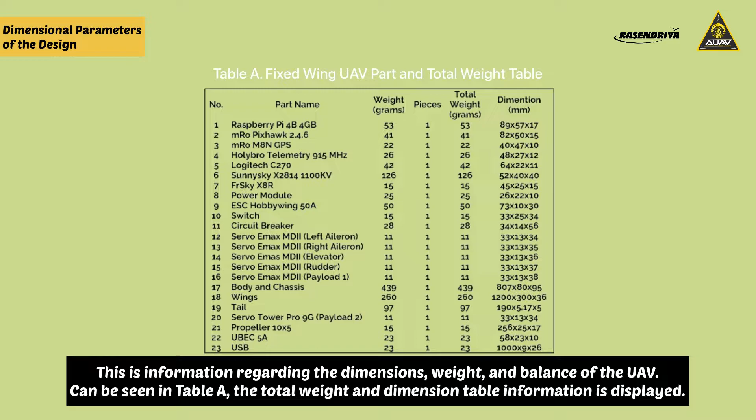So we will explain and show you our vehicle for this competition. Information regarding the dimensions, weight, and balance of the UAV can be seen in Table A. The total weight and dimension table information is displayed, while Table B contains information about X distance, Y distance,

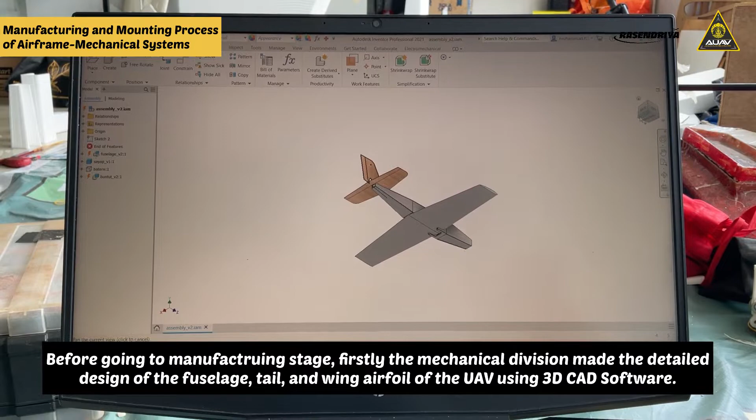and Z distance. Before going to the manufacturing stage, the mechanical division first made the detailed design of the fuselage, tail, and wing airfoil of the UAV using 3D CAD software. Designs made in the software are printed on plywood with 5mm thickness using the laser cutting method.

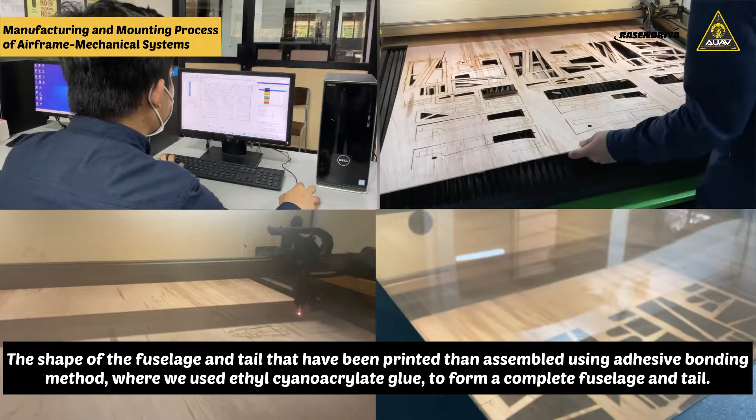The shape of the fuselage and tail that have been printed are then assembled using the adhesive bonding method, where we use ethyl cyanoacrylate glue to form a complete fuselage and tail. The fuselage is made with holes intentionally so that the mass of the UAV is light.

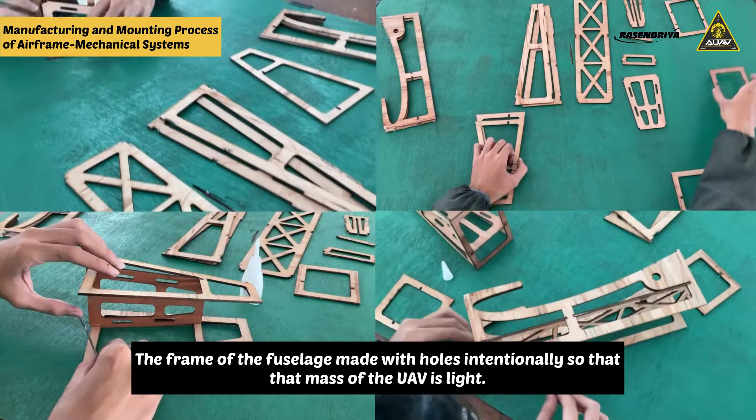After being put together, the frame is laminated with MonoKote to make it more aerodynamic and good looking, so the UAV has good performance when flying.

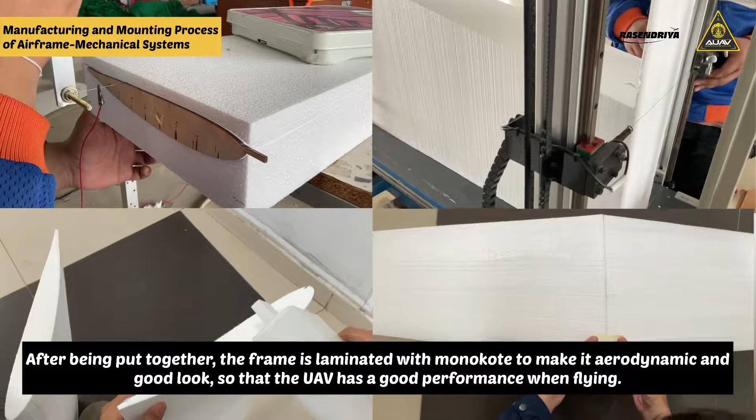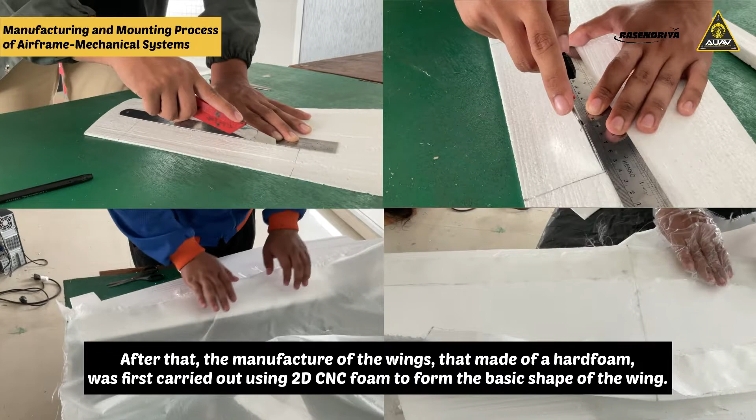After that, the manufacture of the wings, made of hard foam, was first carried out using a 2D CNC foam cutter to form the basic shape of the wing. Then the airfoil mold is used to form the airfoil with the hot wiring method.

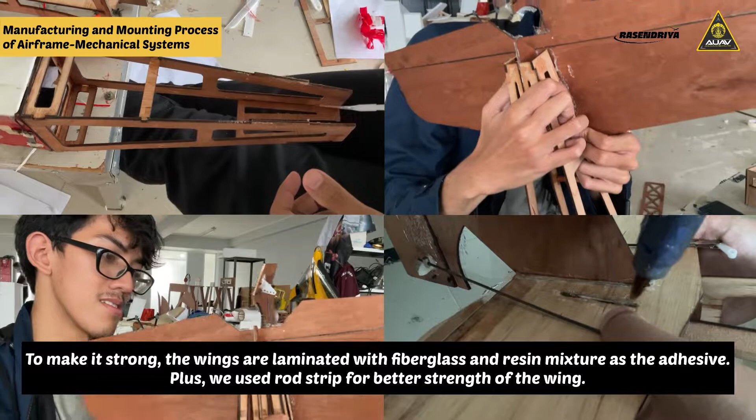After that, the wings are smoothened using sandpaper number 100, 500 and 1000 respectively to get the maximum result. To make it strong, the wings are laminated with a fiberglass and resin mixture as the adhesive. Plus, we use rod strips for better strength of the wing.

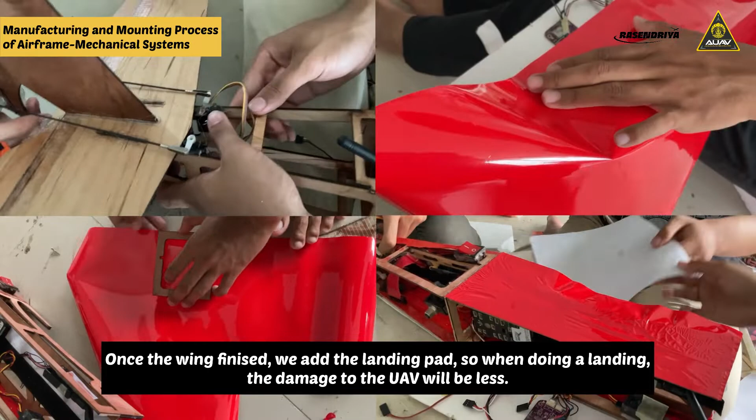Once the wing is finished, we add the landing pad so when landing, damage to the UAV will be less. Once the wing, fuselage and tail are finished, they join together using nut and bolt, along with other methods such as 3D printed components as a media.

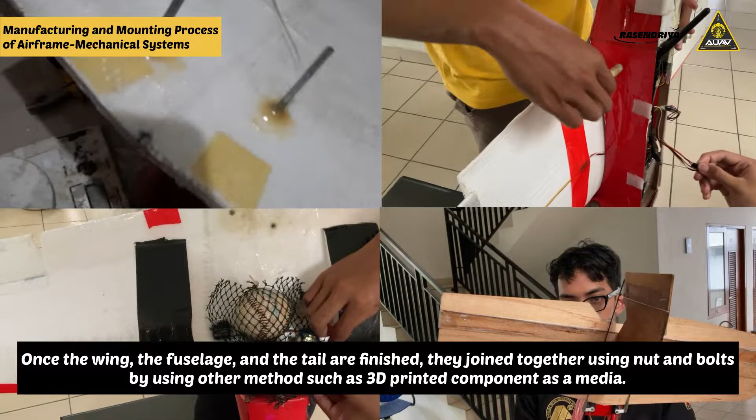For this competition, we are using the S7075 airfoil for the vehicle's main wing. We are using XFLR5 to design and analyze its characteristics.

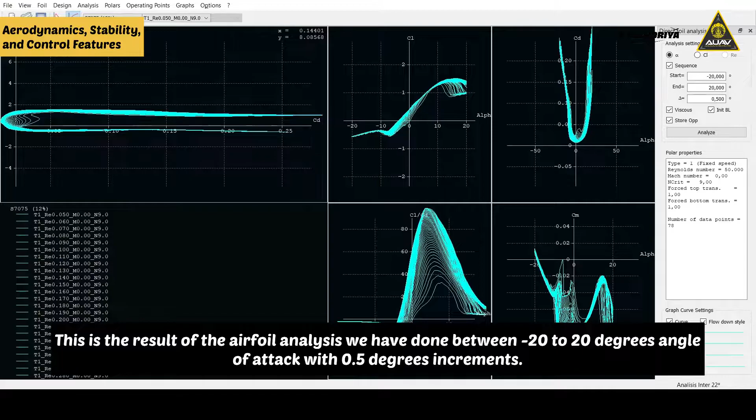This is the result of the airfoil analysis we have done between -20 to 20 degrees angle of attack with 0.5 degree increments. We also ran this analysis between 50,000 to 500,000 Reynolds numbers with 10,000 increments to get more diverse results.

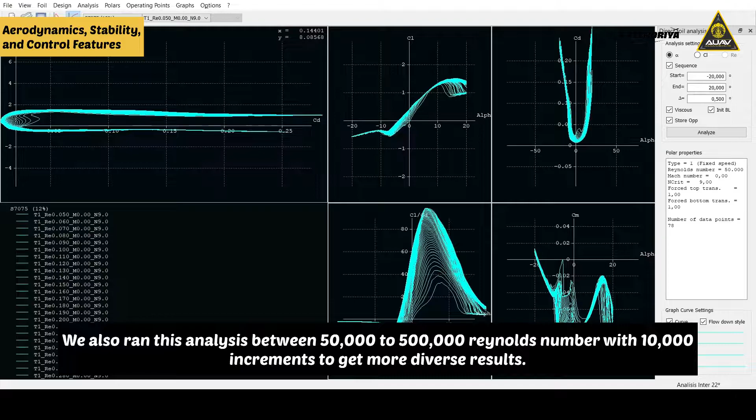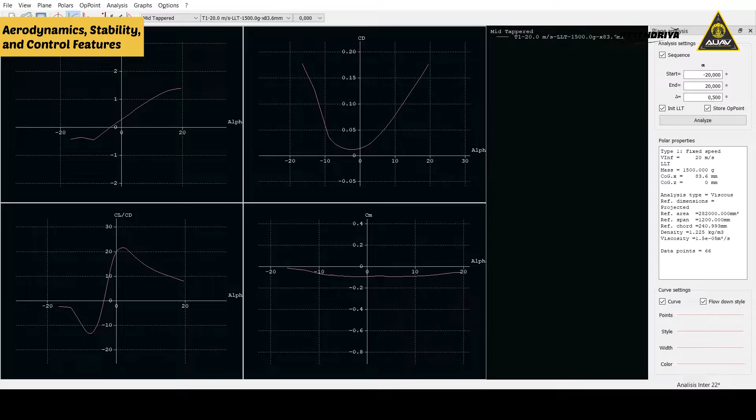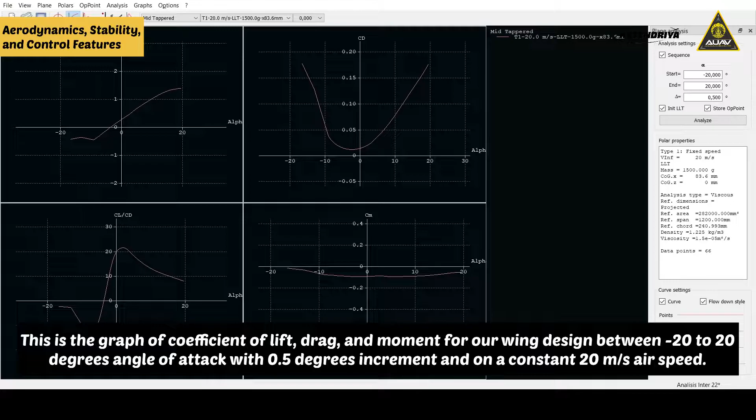This is the wing design that we are using in this competition. This is the graph of coefficient of lift, drag, and moment for our wing design between -20 to 20 degrees angle of attack with 0.5 degree increments on a constant 20 meter per second airspeed.

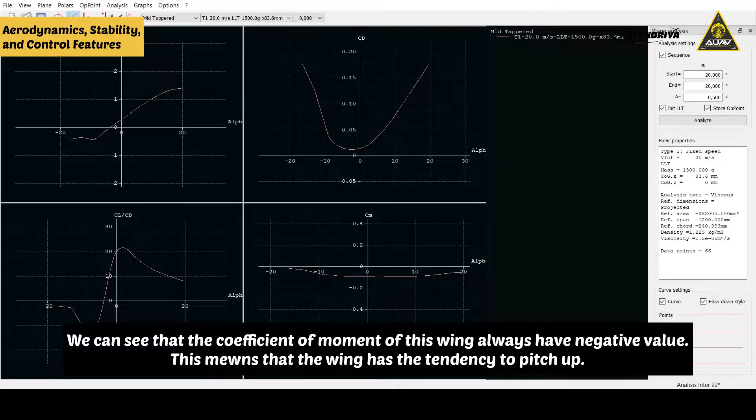We can see that the coefficient of moment of this wing always has a negative value. This means that the wing has the tendency to pitch up. We can counter this by using a well-designed tail to neutralize it.

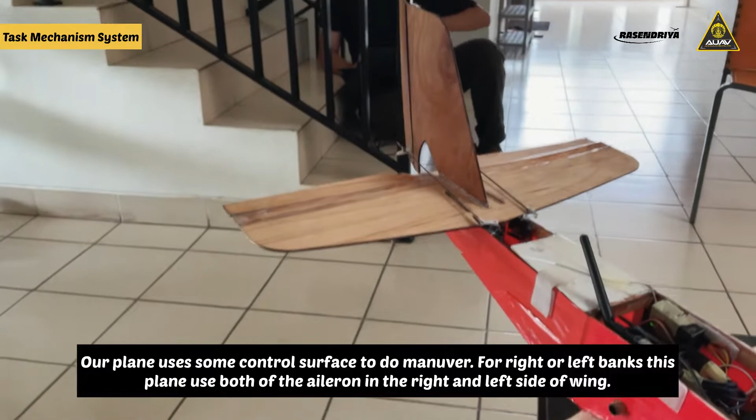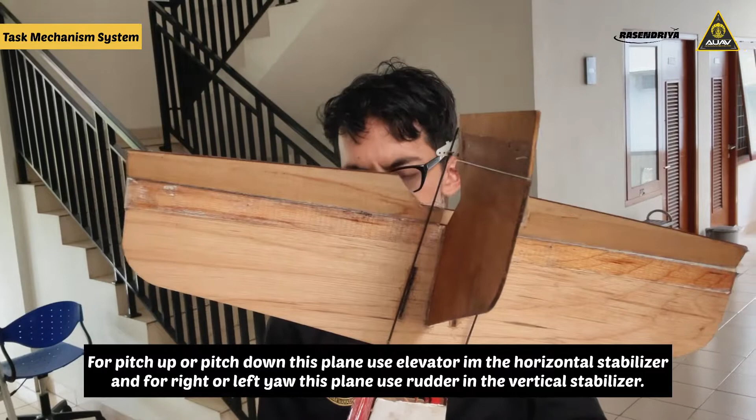Our plane uses some control surfaces for right or left banks. This plane uses ailerons on both the right and left sides of the wing. For pitch up or pitch down, this plane uses an elevator in the horizontal stabilizer. And for right or left yaw, this plane uses a rudder in the vertical stabilizer.

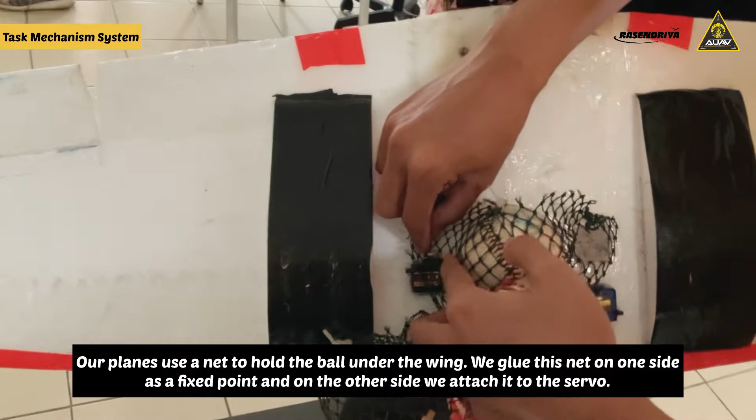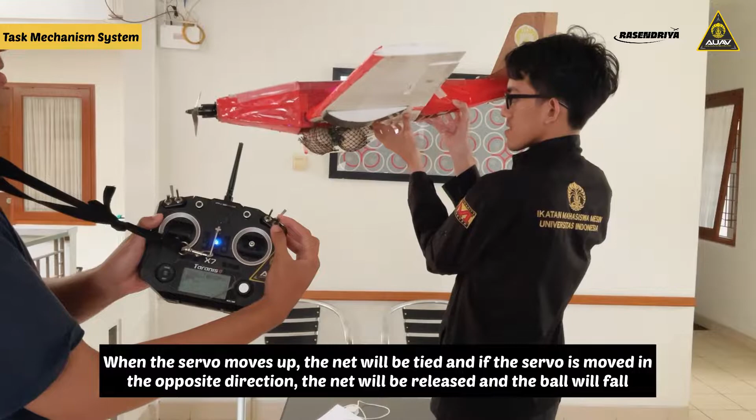Our plane uses a net to hold the ball under the wing. We glue this net on one side as a fixed point, and on the other side we attach it to the servo. When the servo moves upward, the net will be tight, and if the servo moves in the opposite direction, the net will be released and the ball will fall.

To connect all the electrical components, first we should flip the vehicle upside down. After that, we could open the bottom doors and see the electrical components. First we could see the switch already soldered to the fuse, so we don't have to connect it again.

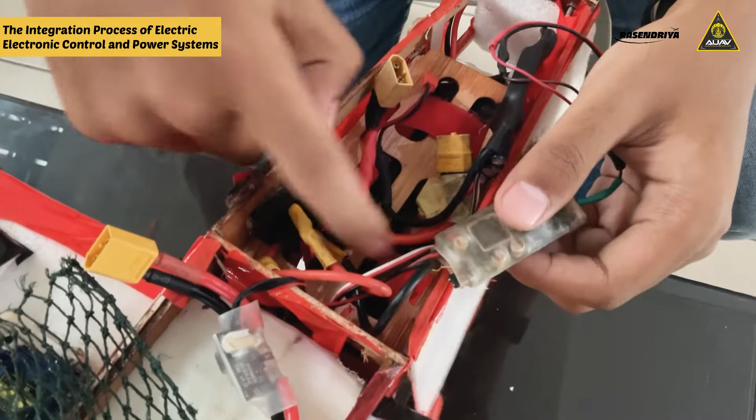After that, the power module can be connected with the ESC, and we have paralleled it from the ESC, and we could connect it to the BEC, or battery eliminator circuit.

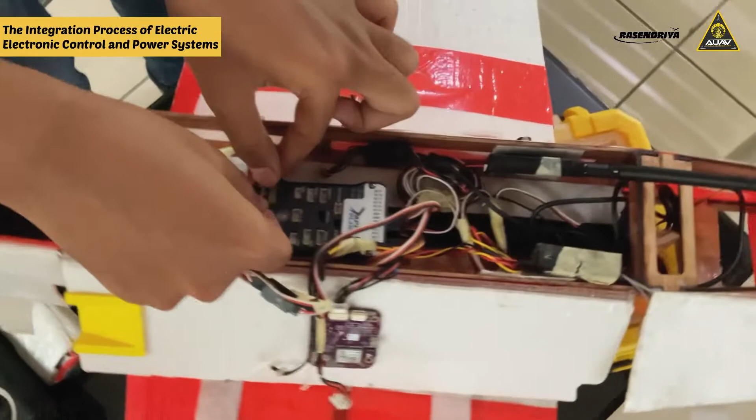The upper section, we could see this is a cable from the motors, and this is cable from the ESC. We could connect it. You could see this is a circuit breaker, and this is a connector to the battery. And then we could connect all the necessary connection to the flight controller, like this is from the power module to power the flight controller, and this is telemetry.

We could connect it to the Telem1. This is a connector from the GPS, we could connect it to the I2C. We could connect the aileron, elevator, the throttle from the ESC, and the rudder to the flight controller. After that, we could see this is RC7 and RC8. This is for the dropping servo, and this is RC in, we could connect it to the receiver.

Could connect the power from the BEC to the companion computer. After that, we could connect the cable. We could connect the camera. This is the USB to connect it to the companion computer.

Okay, that we could place it on the upper door, and then we are ready to go.

We use a circuit breaker that has 50 amp maximum current to stop the current if overcurrent happens, and AWG12 cables to deliver the amount of current safely. After that, we also add a switch to stop the battery giving power to the vehicle as quick as possible, to prevent impact to the battery if a crash happens. We also add a sponge in front of the battery.

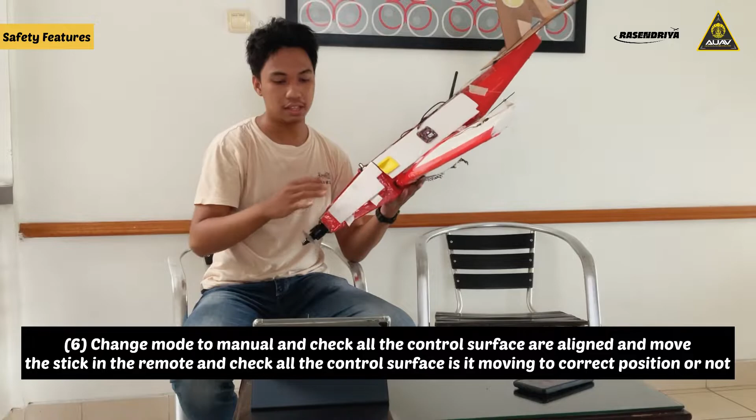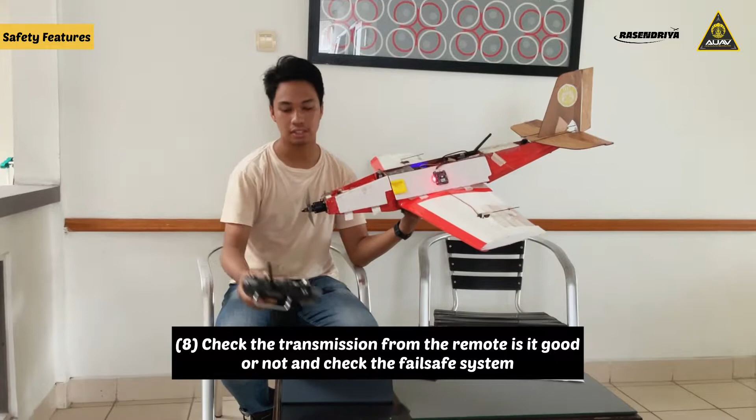Check all the cable connections, it should be connected to the correct position and mounted perfectly. After that, change to manual mode and check all the control surfaces, is it aligned or not? After that, change mode to stabilize or fly-by-wire and check all the direction from the control surface, is it correct or not? Last, check the transmission from the remote, is it good or not? And check the failsafe system.

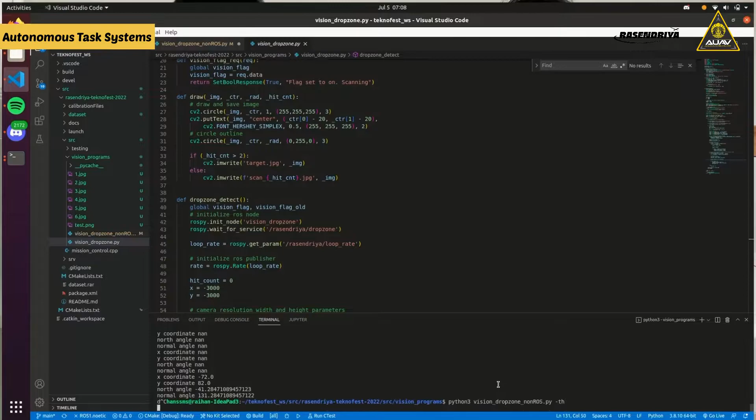For the software itself, we will use Python with the OpenCV library, where we detect the target based on its color and its shape. We detect the targets and then they will be converted into longitude and latitude coordinates, and will be used as a mission waypoint for the flight controller.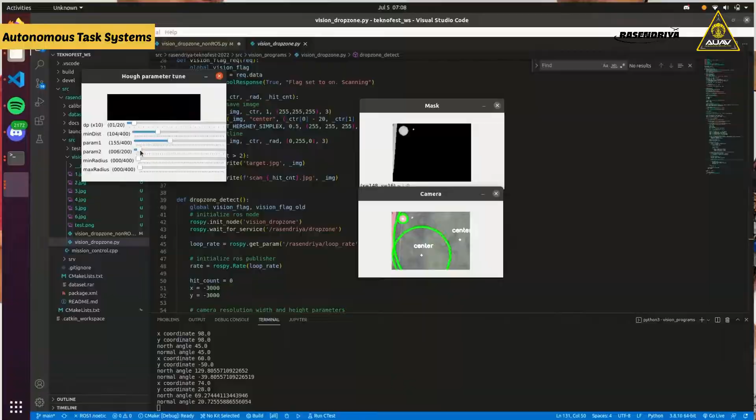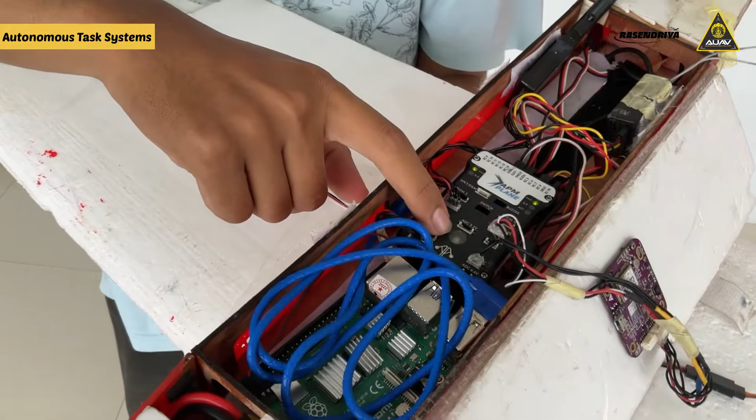For the autonomous system test, the hardware we use is 4 servos for controlling the orientation of the plane, and we use a microcontroller which has an accelerometer, gyroscope, barometer, and magnetometer, which connects to the GPS to sense the orientation, position, and control of the plane.

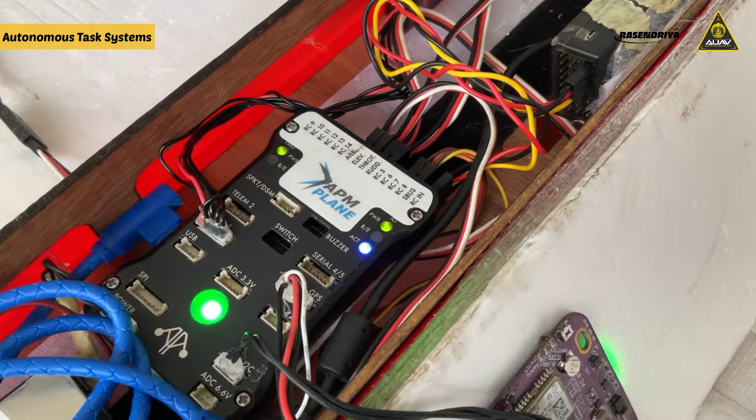And we have a Raspberry Pi computer here for the second mission, to process and detect the drop zone and plan and program the plane to drop at the correct coordinate. Also, we have a receiver for the remote to enable control of the plane from the ground, and we have telemetry to monitor our plane data from the ground.

And for the dropping, we have 2 servos for dropping the target, and we have 1 camera sensor from the webcam to sense the target.

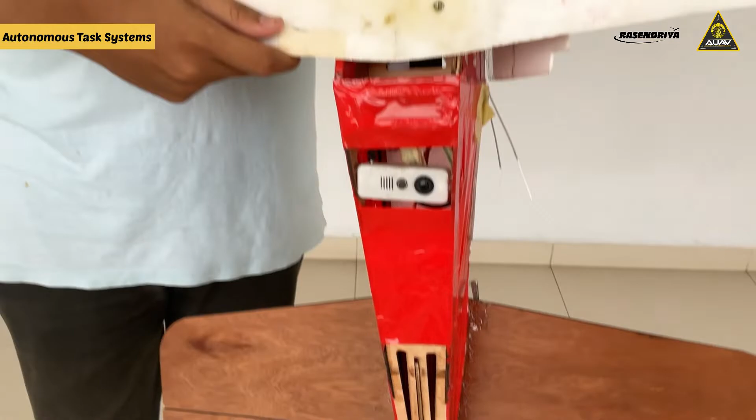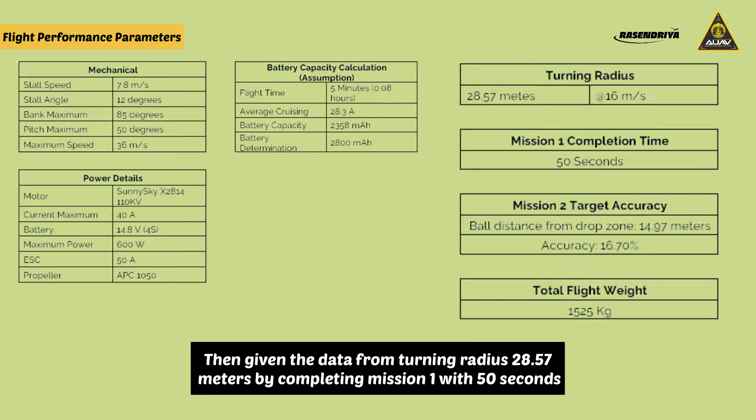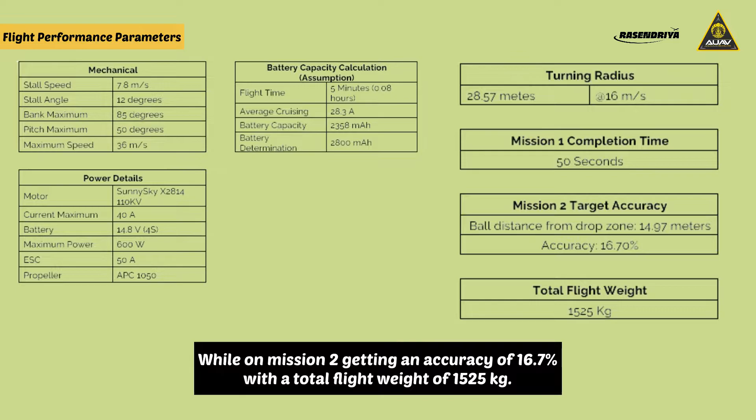Mechanical data, power detail, and battery capacity calculation are presented, then given data from turning radius of 28.57 meters, completing mission 1 in 50 seconds, while on mission 2 getting an accuracy of 16.7% with a total flight weight of 1525 kilograms.

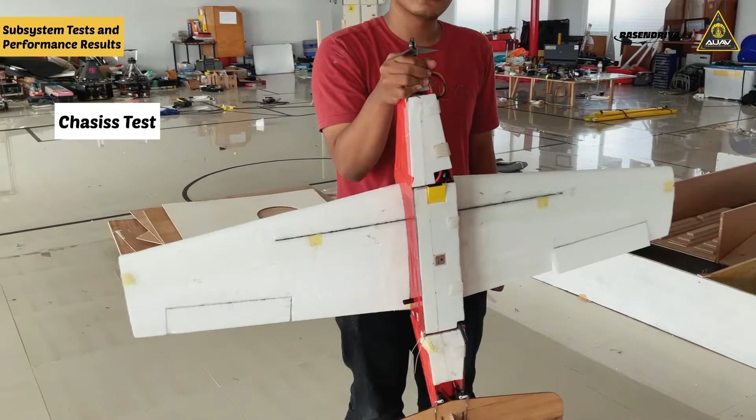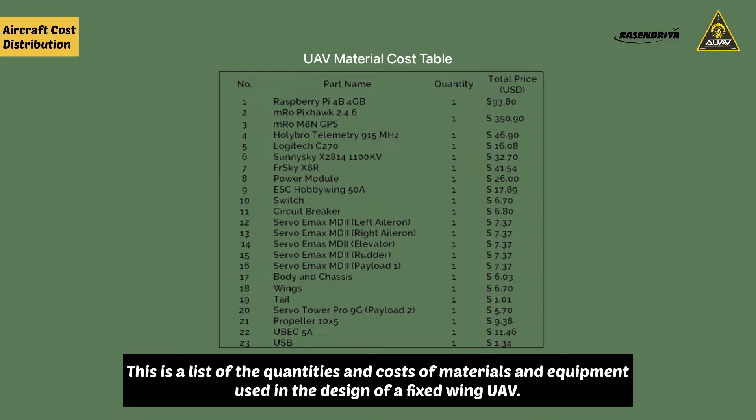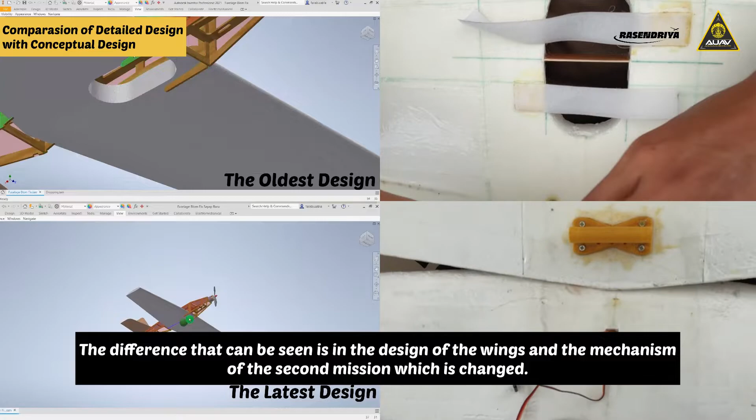This is a list of quantities and cost of materials and equipment used in the design of a fixed-wing UAV. The difference that can be seen is in the design of the wings and the mechanism of the second mission, which is changed. The wing in the conceptual design has a flat taper model or configuration, meaning the front of the wing is flat and the back of the wing is tapered. But when we realized it, it tends to be heavier at the back and requires a ballast.

All the recordings here were made this year for the Teknofest competition, and we are here to confirm that the original recordings are our own.